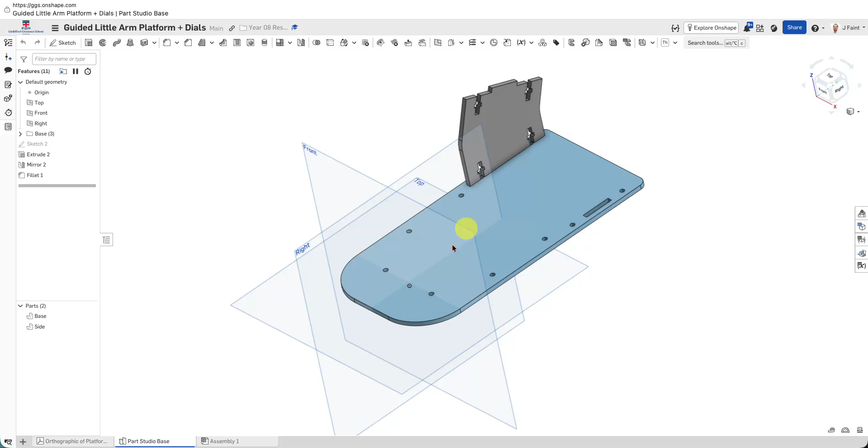All right, well done. We've gotten through to stage 3. We have our base and our side developed, which we may end up modifying a little bit as we go. But what we need to do now is we've got our individual parts, but what we have now is we'd have two of the same part.

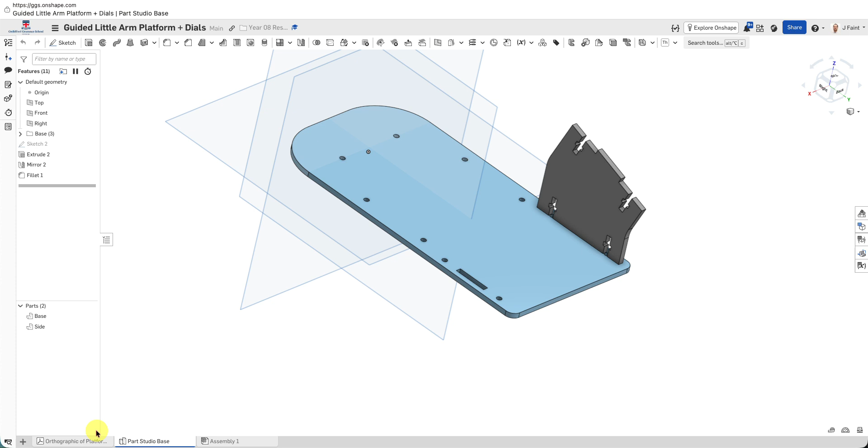Now, in a part studio, we only ever want to draw in one instance of everything. So in this case, because we've got two things and we're going to be building some other things into it, we need to use our assembly tab. So we're going to click over onto that to be able to make our way through. So at the moment there's nothing in here, but again, have a look at the top and we've got some different options that we have.

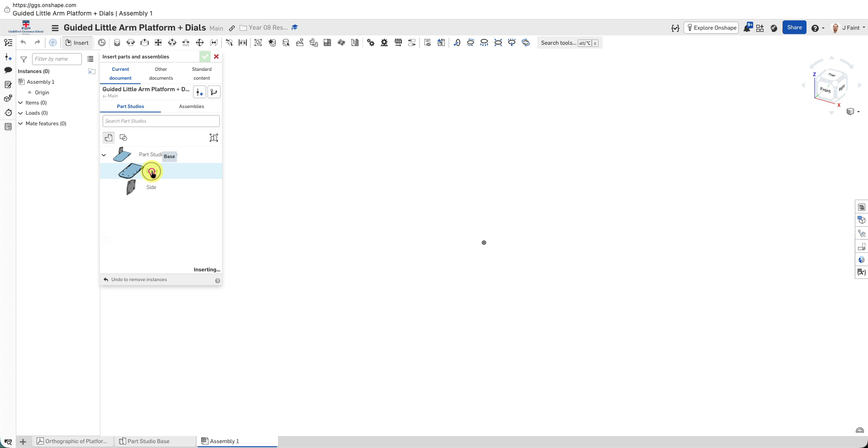We've got some instances of stuff in here. So at the moment, we've got our origin, which is a really good starting point. So we're going to start by inserting our parts that we need. So at the moment in our current document, we're going to add in one base and one side. And then we're going to go tick.

So from there, we can move our pieces around and see how they fit together. But what makes it easier to be able to work with is we want to fix something in. So what we have to do that are these mates. And for most of what we do, the fasten mate's going to be good. Sometimes we might use some of these other ones to be able to show movement and action like that. But for this instance, a fasten mate is perfect.

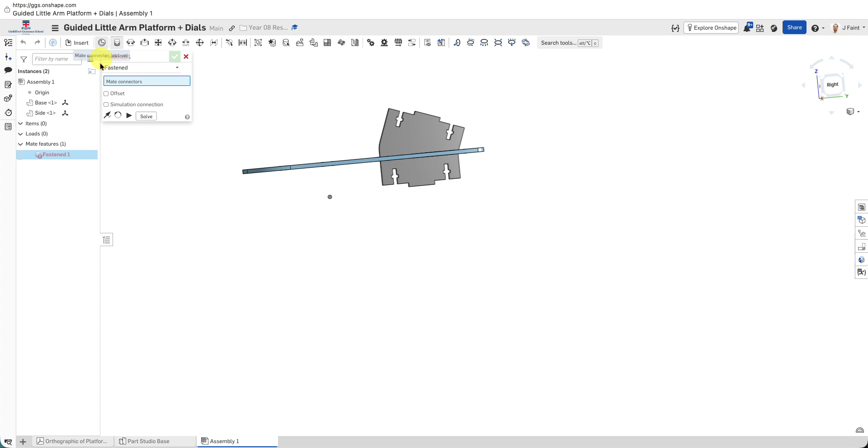So the shortcut for that is M. I'm going to click on that. And what this asks for is we need to click on two things that we basically want to glue together. So I'm going to start with the top. So notice how the shape and the orientation changes. I want that to be up and down.

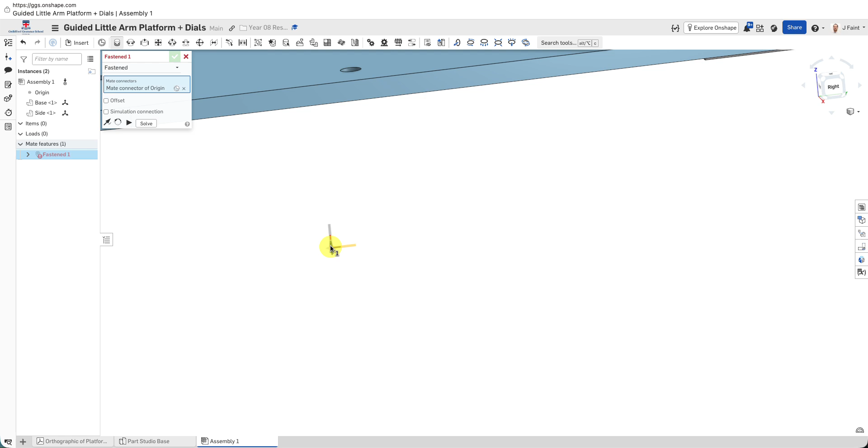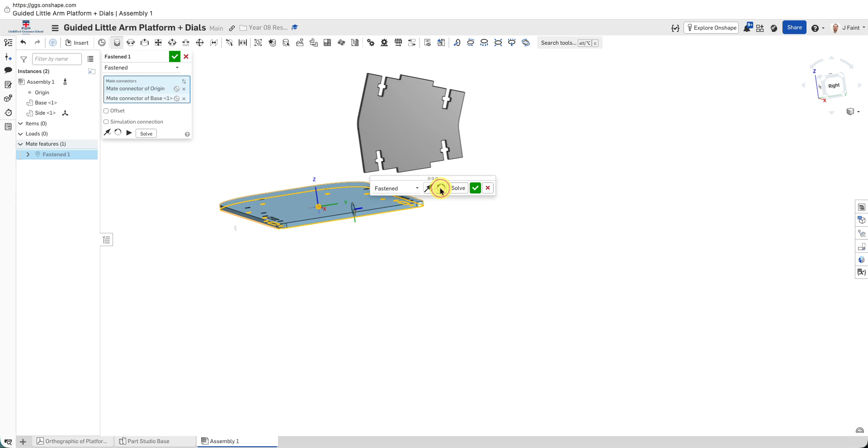So if we have a look closely at that, we can see we've got a certain orientation going up, left. We want to find the center of this one, so it's the opposite of that, so they align perfectly. We can always adjust them with the offset later, but if we can get it right in the first instance, that's good. If I want to be able to change it or rotate it, we've got some options in there as well. But in this case, pointing that to the front is awesome, and I'm going to hit tick.

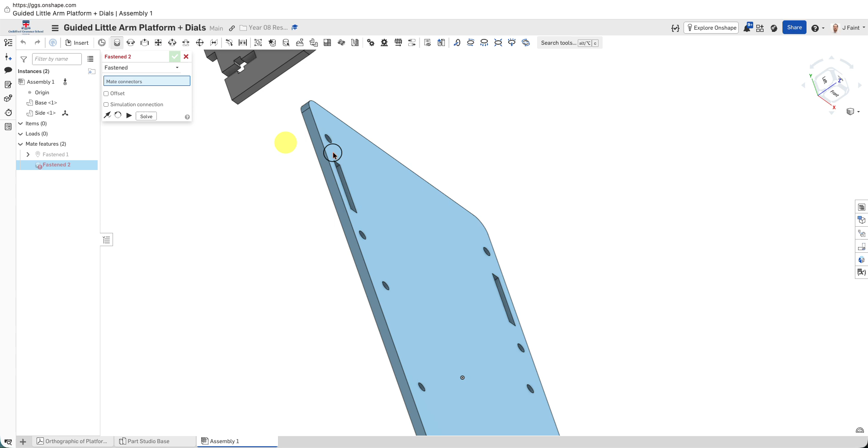So from there, what I need to be able to do is I want to attach this guy in as well. So the easiest way I find is using edges. So if you think about what edge needs to be touching in here to that. So rotating is your friend in here. So I'm going to start by going on that inside edge there. Notice I've got it going along almost like the cylinder that way.

So I'm going to click on that and I need to replicate that over here. So that edge is going to touch there is going to be this one here. And then I'm going to go tick. So what I should be able to do now is I've got one of those done.

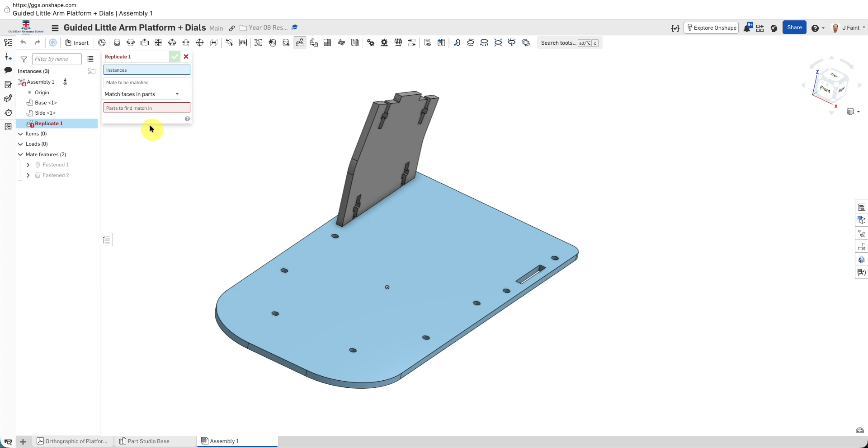Now I could copy that and do that process again, but what I've got up here is I've got a replicate. So what I can do with that is I'm going to choose that. And what is this going to ask me to do is I want to replicate that, and then I should be able to find a copy of that as well. So then it automatically creates it. But notice what I've done in that first place.

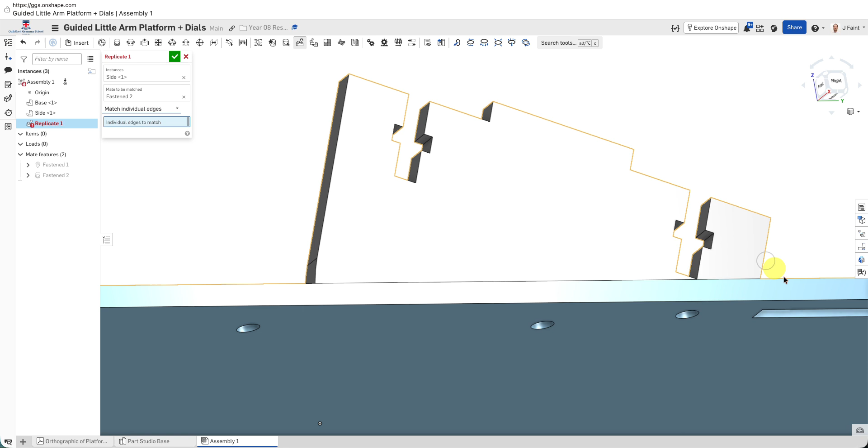I only need individual edges. So let's start by just selecting that edge, which is going to probably be that one, isn't it? No, it's going to be that one, outside edge over here. So taking the time, and so it just makes our life easier. We could do the mate again, but I want to show you some different tools.

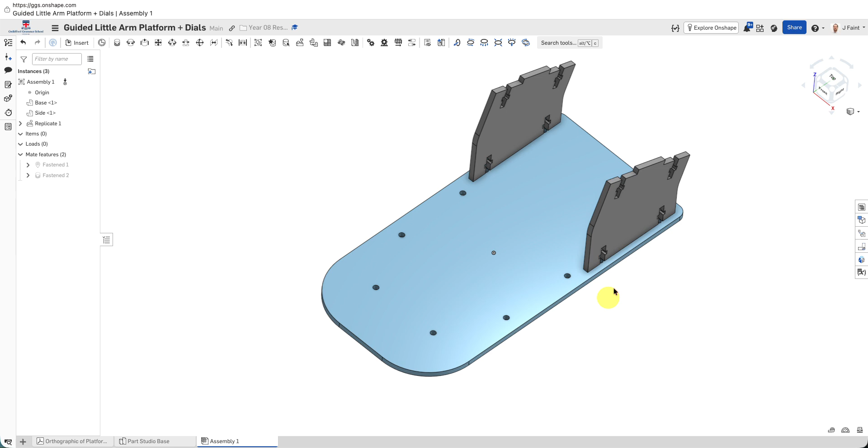So now we've got our base set up. Now we're missing some pieces. We're not going to put the arm in, but we are going to put the PCB, and we are going to put in our controller PCB. So I'm going to come back over to the insert, and at the moment we need to go into another document.

If you go into Home, into Guildford Grammar School, into Reference Materials, you'll see we have Engineering Components. Now, if you search through, there's a couple of things that we need to include. That PCB LittleArm is the first one.

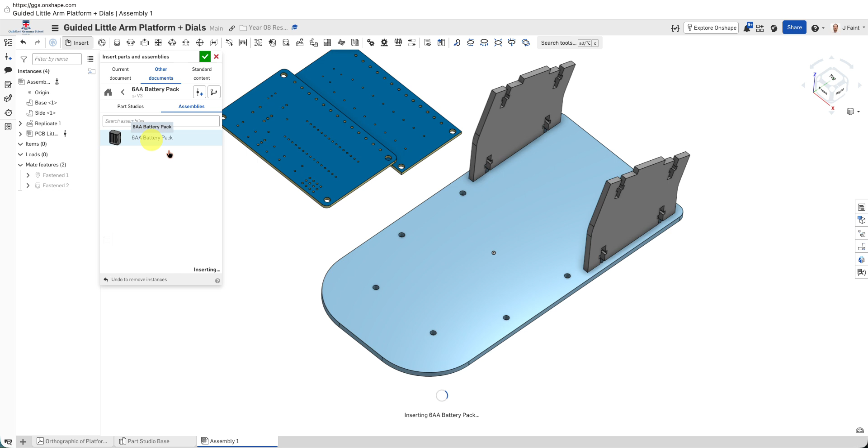And what we want here is the assembly. We're going to go through and we want that PCB LittleArm controller, and we're going to put those in. Doesn't matter where, we're just going to add them in there. From there, we're going to go back out of this, find our double A battery holder, not the 8, but a 6. We've got lots of different general components, so we're going to insert him in as well. Make sure you're on the assembly, not the part studio, click him, and hit OK. Now we have our components.

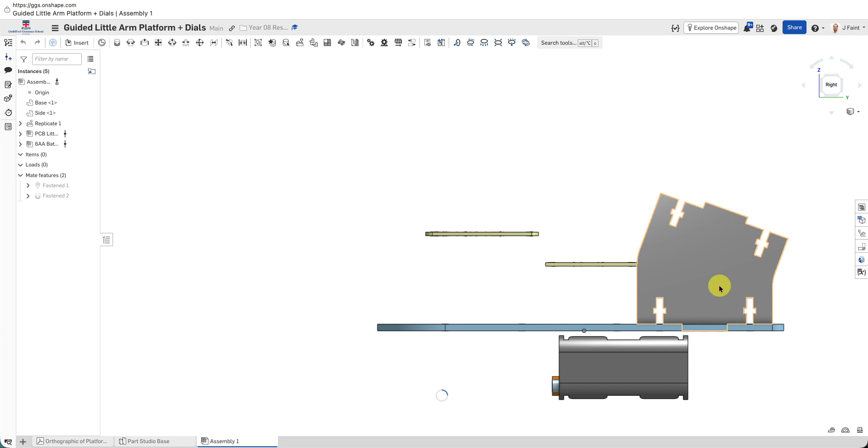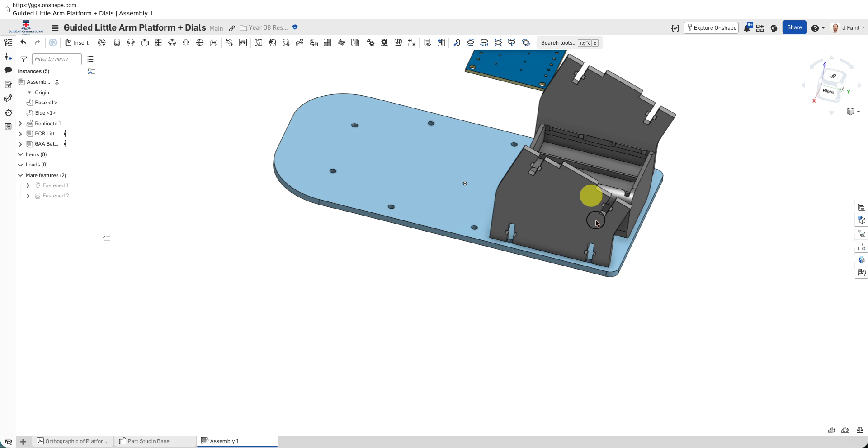So what we can do now is if I click on that, I've got a handle to be able to rotate. I'm just going to add this guy in because I want to look at where he needs to go. I'm going to go square, bring him up so he kind of sits in the spot I want him. I go to top, and that's probably about where I'd like it. If we have a look, that's probably enough space for my PCB. I could make it a little bit shorter, I could make it straight, but we want to make sure things fit.

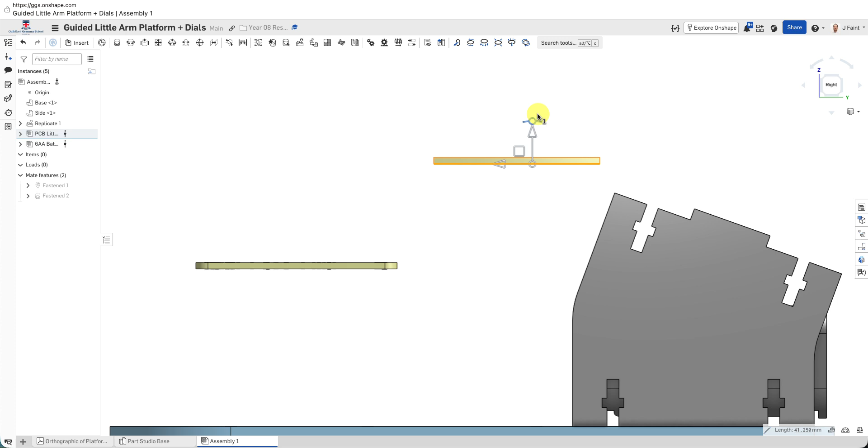So I'm just going to leave him sitting there. This one is going to be on our controller. If I go to the top, he's going to be sitting somewhere around there, back to my right. I'm going to bring him up, and he's probably going to be sitting on top of this somewhere. I'm going to click on him and rotate him so he's on a similar angle. This is just for reference at the moment. So he goes there.

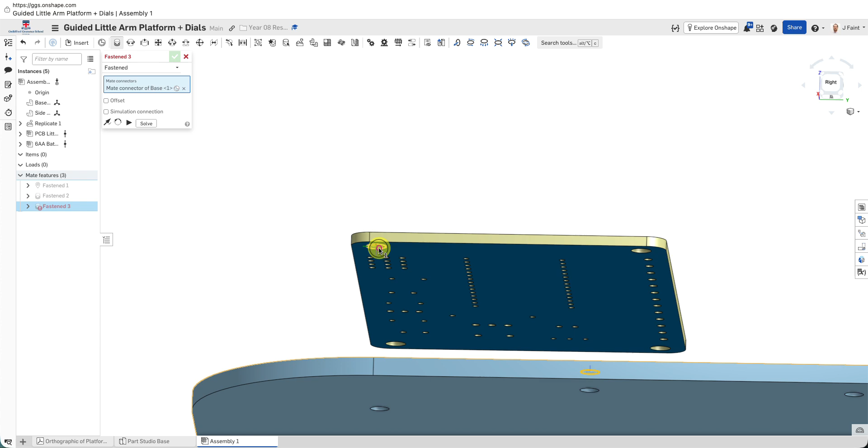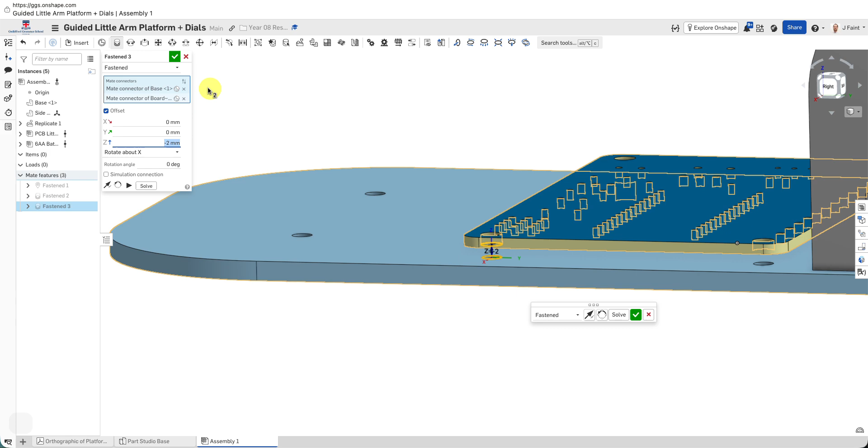And then this guy, we're going to actually fasten him in. I'm going to go on that circle there and that circle there, and if I got everything right in the dimensions I gave you, that should align beautifully. Now, this guy's probably not going to sit directly on the bottom because we've got little spiky bits, so let's offset that. We've got the Z up and down, that's the one we need to offset. I'm going to go up, and we can see it's going the wrong way, so I need to go back down the other way. I'm just hitting the arrow to bring it down. Let's go like 2 mils down, that's probably similar to what it shows. So that's kind of where we want to look at. That's where it's going to be.

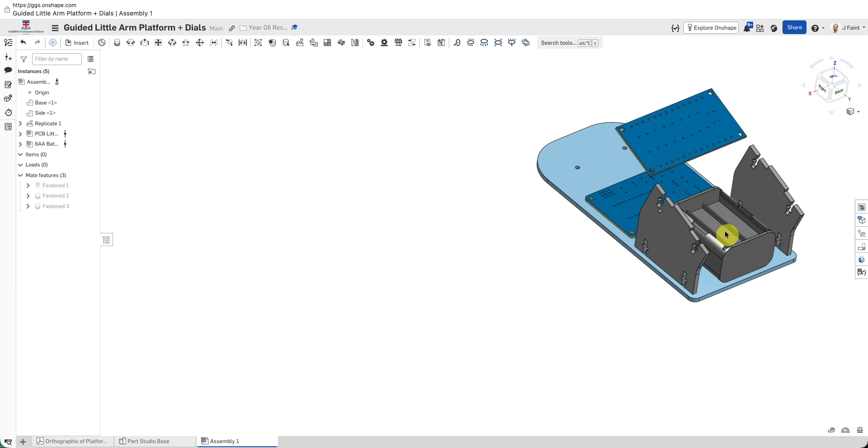We've got connections for our arm here, and there's going to be a bunch of terminal blocks on this side that we're going to then attach up to here, depending on how you have your setup. Now, I've got mine set up, so I'm going to have some sort of control board that sits there. As long as it doesn't go over the top of that, that's our next stage that we're looking at. But at the moment, I have everything in that I need to be able to model around with the exception of my components, so I might bring those in now as well.

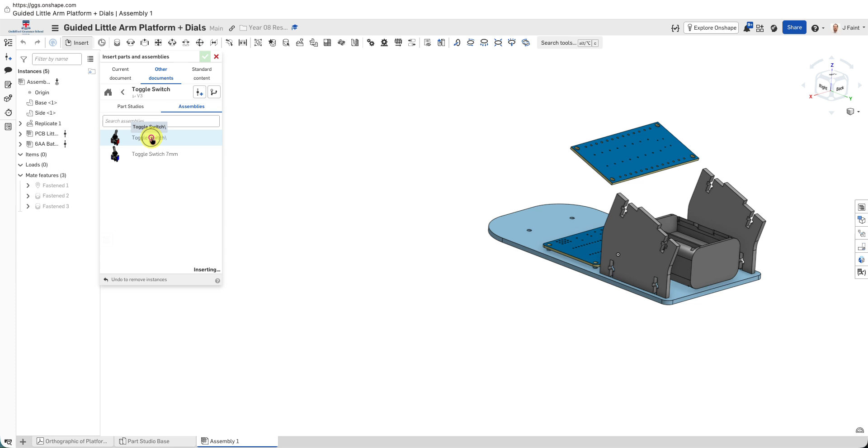So we're going to go to Insert, in that other document, go back out of the battery pack, and I need to go through and find the pieces that I need. Keep going through - I think it might be that toggle switch. He looks a bit funky at the moment, but let's have a look in assemblies. I want the standard one. So he goes in there, so we're going to need one of those. You might need more, we keep going through.

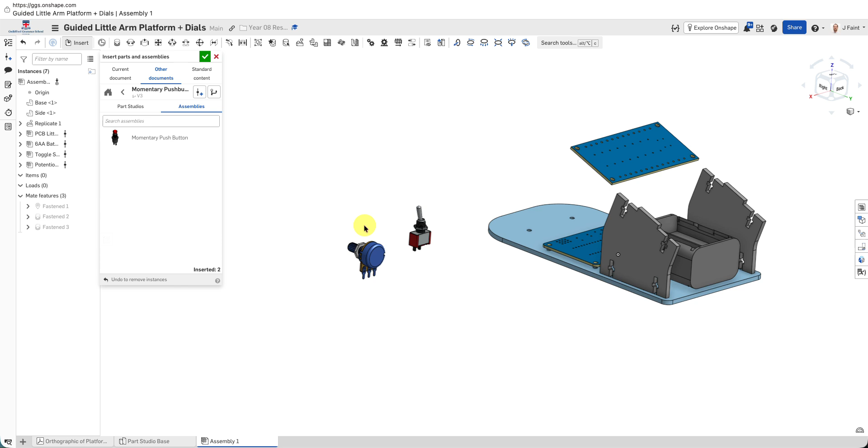We're going to bring in, so these are the other components we're going to use - one of those potentiometers. Make sure you're in the assembly, bring that through, click it somewhere, go back out, and then we've got the last button we're going to be using, which is that momentary push button. And again, pick the assembly, bring it through, and go tick. So what's really cool about this is we can then have a look at how they're going to exist.

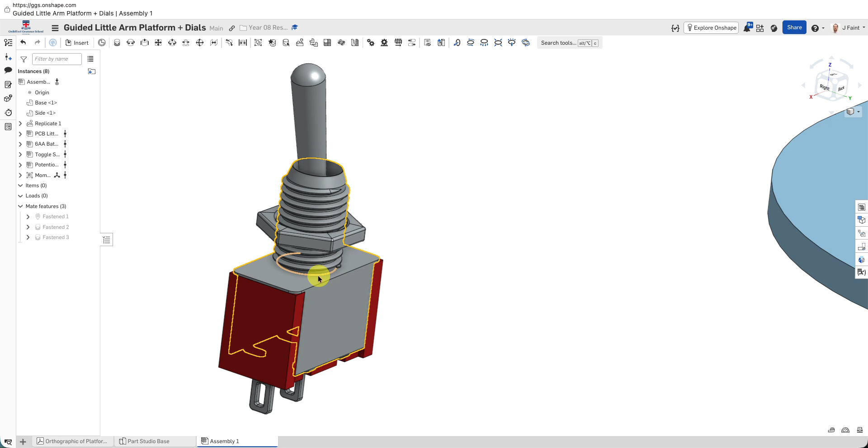Now, these are pretty close to what our actual things are going to be, but each of them will have, if we have a look - can I get that circle? Will it give me that? Not on that one, let's try this one. So they're all about - if we have a 7 mil hole in our board, we will have space for all of these to sit. So those are the components.

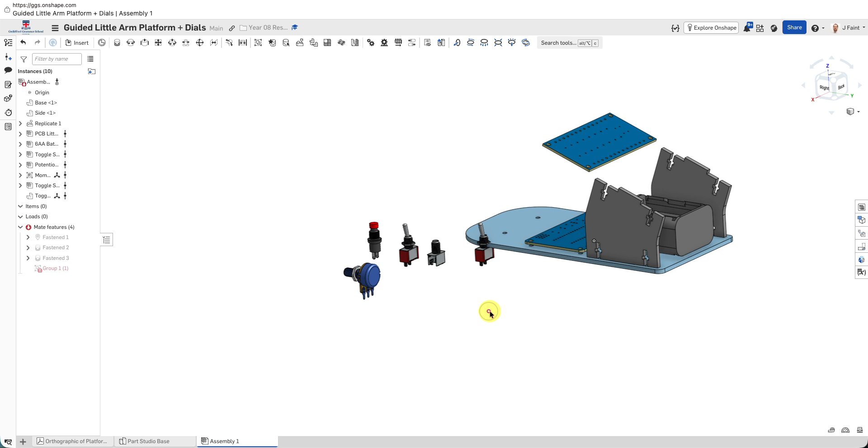If we need more - you will need more than one for the combination of everything. But if you want to have two of these, we can choose that toggle switch, Command C, Command V, and we can bring more than one in. Now, that is a problem that I will have fixed up before you get playing with this, so I can make sure these guys stay together for you.

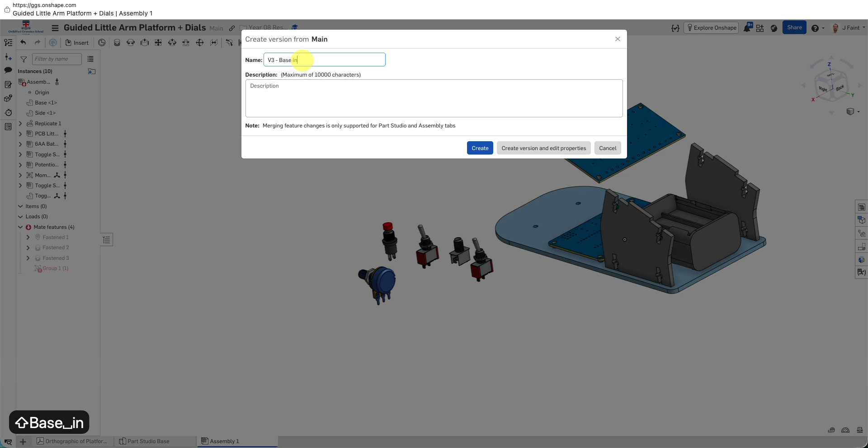But that's the stage we're going to stop at. So we're going to go to Create Version - version 3, this is base assembly with parts, or with components.

Okay, so next stage, we're going to have a look at designing up a controller that will have some features we can look at. So well done on that stage, we'll see you on the next one.